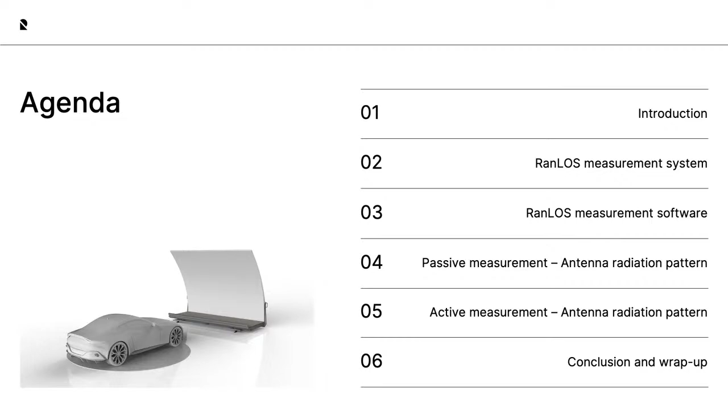Today we're going to present our view on how to do OTA measurement within the automotive industry. So the agenda for today is to give you a short introduction of our company, then we'll go through the measurement system and our software, and then we also have passive and active measurement data as well as videos, and then we have a few minutes for conclusion and wrap up and also for questions.

My name is Louise Rosdahl and I'm the CEO of RanLOS. Today I also have Professor Jan Carlson with me. He has more than 30 years of experience from the EMC and antenna field. He is a member of the International Steering Committee of EMC Europe, and he is also an adjunct professor at Chalmers University of Technology. I also have our sales director, Mr. Lars Granbom. Lars started off at Ericsson many years ago. Then he has been a successful entrepreneur in multiple companies within antenna design and measurements.

Then he applied for multiple patents around the globe, which we now have today in the company. And then the products have been developed during the past years, for instance, in a Swedish government-funded program together with Volvo Cars and some other partners. So that is a little bit about our history, and now I will hand over to Lars, who will present our products more in detail.

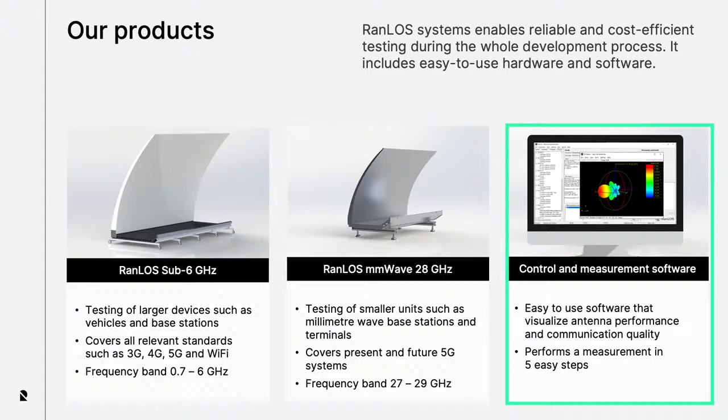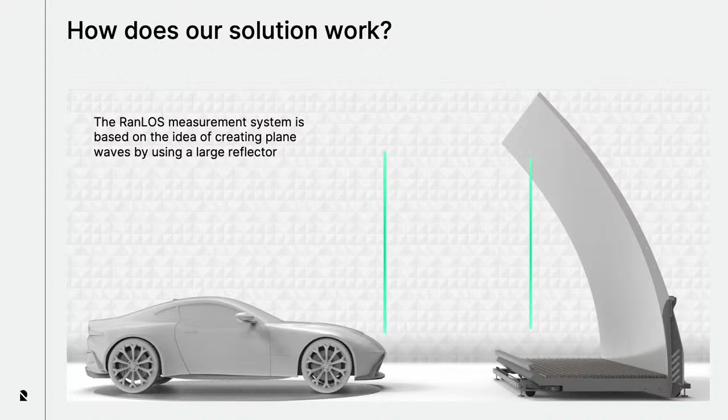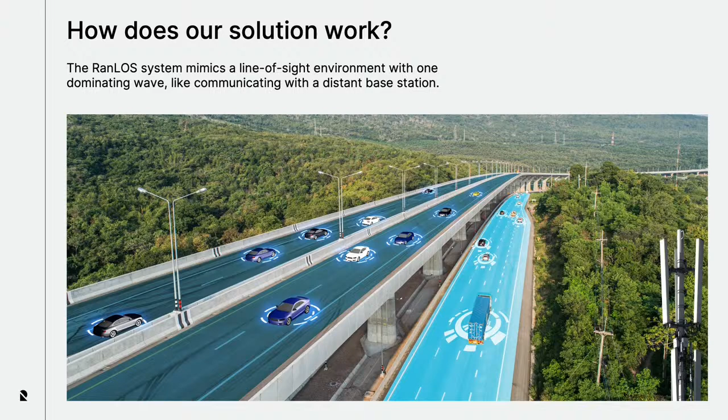This is how it works. A dual polarized linear antenna array is feeding the cylindrical reflector, which is converting the wave to a planar wave, simulating a far field environment for the object that we are testing. Comparing with the real world, the RanLOS system simulates a line of sight environment. Communicating with a distant base station, the dominating wave is arriving at the car in a randomized angle.

If you compare with a mobile phone communicating inside a building, you have a totally different environment that we call a rich isotropic multipath environment. This open environment that we see in the picture is the one that we think is the most used in these kinds of use cases, as we see here.

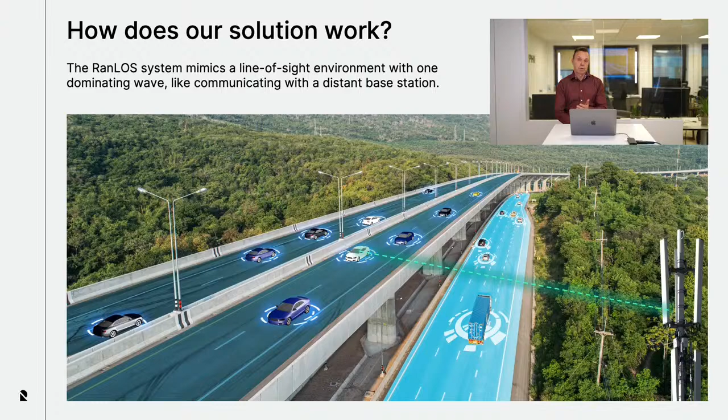The system consists of an antenna array and a cylindrical reflector, as we said before. The antenna arrays are easily changeable. We have today antenna arrays from 700 MHz up to 6 GHz. If we in the future want to have higher frequencies, it's easy to change the antenna array to an array with high frequency antennas.

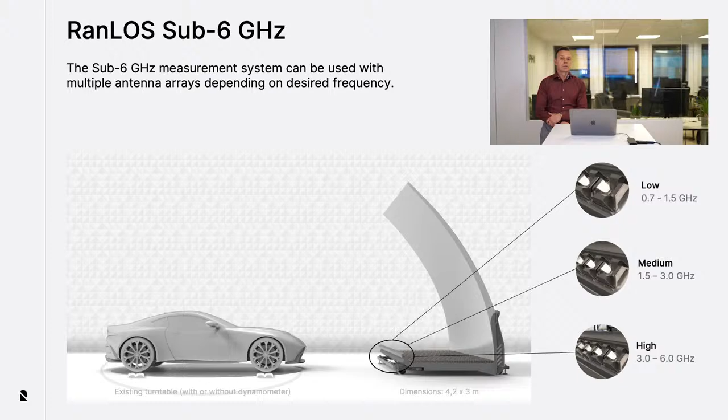The object that you are testing is placed on a turntable, and the turntable can be equipped with or without dynamometers. So this is a simulation of the real-world usage of the car in this case. And with this I hand over to Jan Karlsson.

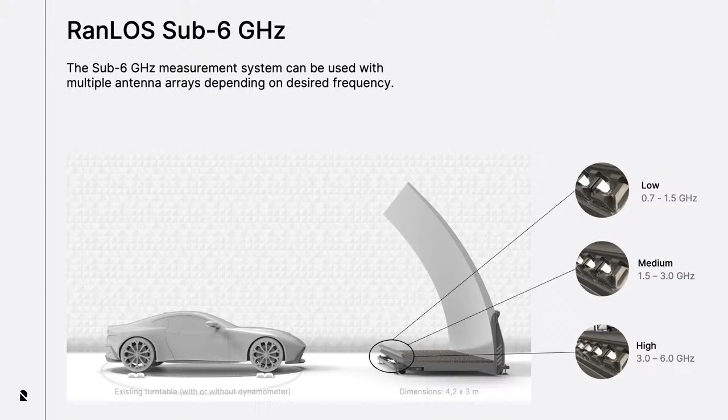So my name is Jan Karlsson and I'm the CTO of RanLOS. And I would like to focus a little bit more on what we actually can use our test system for. So we will start with what we call passive measurements, and that is that we can measure antenna radiation patterns.

So for this measurement, we use a vector network analyzer. One port of the vector network analyzer is connected to our test system, and the other port is connected to an antenna on the equipment under test. And then we have a computer controlling the test instrument, and the computer will also control the turntable in this case.

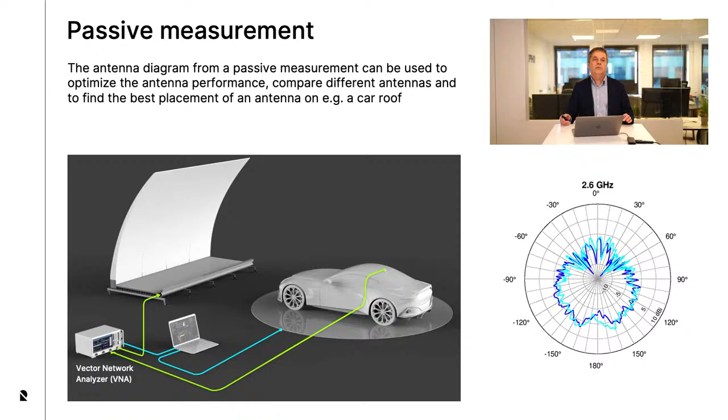So here is shown one comparison that we have done. We have of course done a lot of comparisons, and in the picture to the left you can see the measurement setup with our test system, our sub-6 test equipment, and on the turntable is placed a body of a car. And then we have several antennas on the roof of the car. In this case it was simple monopole antennas.

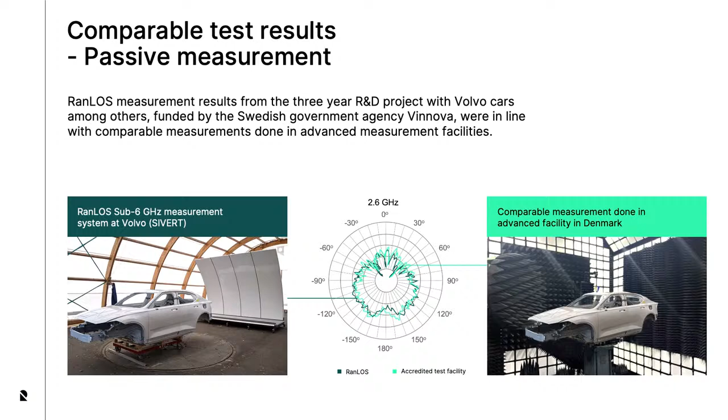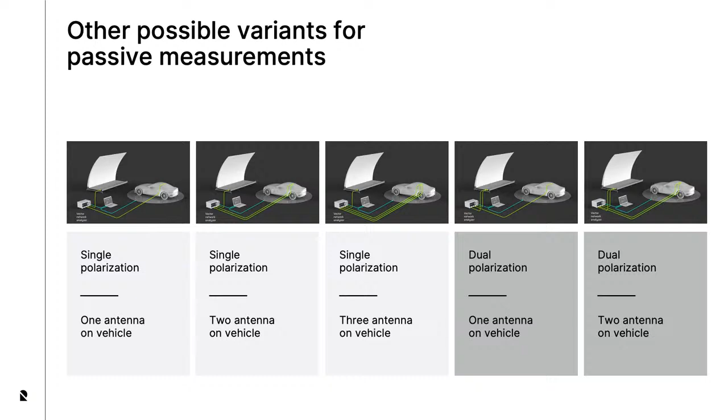And to the right, we have setups for dual polarization. In this case, you connect 2 ports of the vector network analyzer to our test system. And then you can measure the 2 polarizations simultaneously for a single antenna or for 2 antennas on the vehicle. So we have different options here.

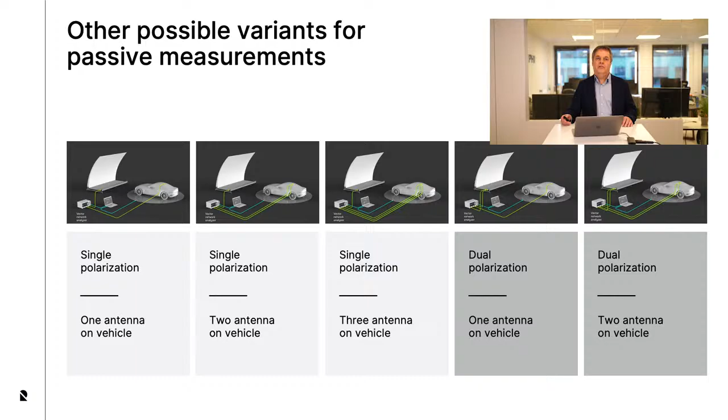So that was the passive measurements, and now I would like to mention a few words about active measurements. By active measurements, we mean that we measure communication performance. That could be block error rate, could be throughput, or other parameters that you're interested in. And this could be 3G, 4G, or even 5G systems. It only depends on what kind of communication test instrument you have.

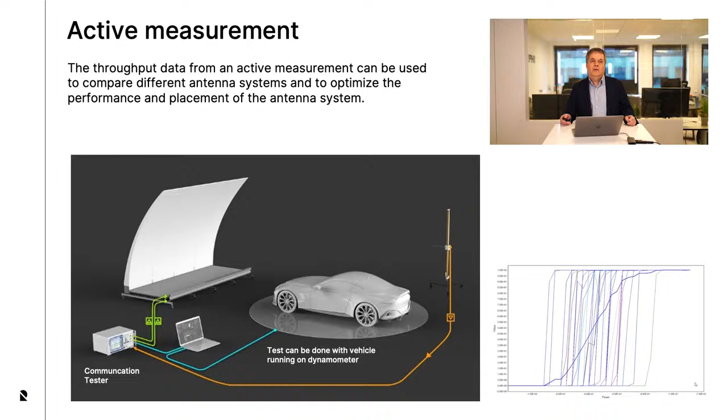So on the y-axis you have the throughput in percentage, 100% at the top and 0 at the bottom. And on the x-axis you have the power level. To the right you have a high power level in the downlink, and then the power decreases towards the left in the figure. So what you can see is that for a high power you have 100% throughput, and then suddenly at some power level the connection is lost. The throughput goes down to 0.

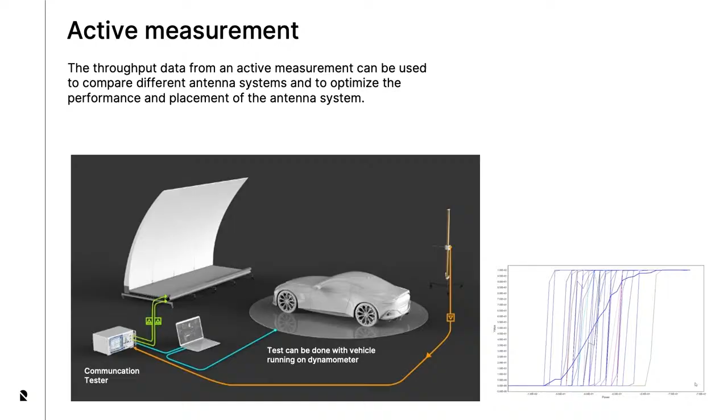In the center figure, you can see actually 4 curves. You have the blue curves representing measurements, and one is solid and one is dotted. And these 2 curves represent different modems on the car. So it's a different antenna system, you can say, on the vehicle. And the turquoise lines represent numerical simulations, and that is quite complicated simulations that we have done in a numerical tool. And that is the picture to the right.

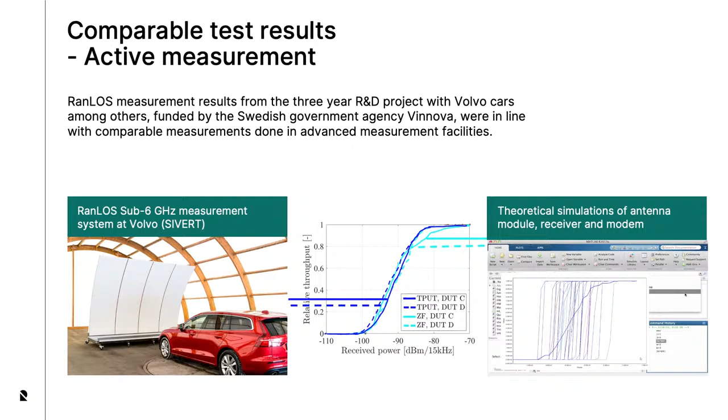But once again, you can also see that the agreement is very good here. So measurements agree with simulations. So we are confident that our equipment works very well for both passive measurements and also for active measurements.

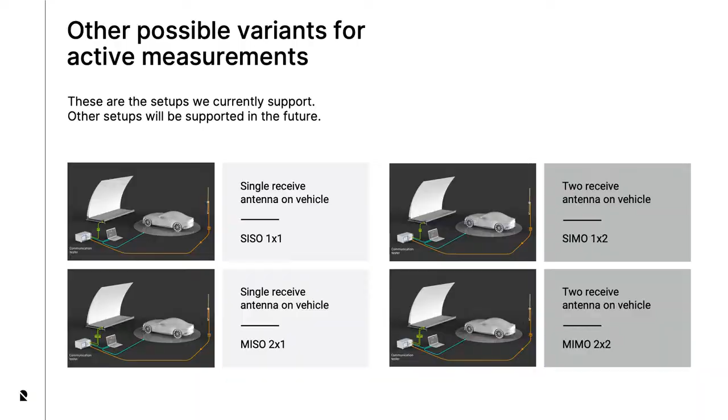Okay, so now you have seen that we can perform two different types of measurements. That is passive measurements for antenna radiation pattern and active for communication quality measurements. And everything is controlled by our software, and the software is easy to use, and you simply follow 5 steps. In the first step, you select the setup, that is, you select from a number of passive or active setups. And in the second step, you select the measurement instrument that you will use. And that could be either a vector network analyzer or a communication tester. In the third step, you select the positioner, and in the case of a vehicle, that is probably a turntable.

In the fourth step, you perform the measurements, and in this step, the software controls the instrument and the positioner and collects the data, which is saved in files. And in the last step, you can analyze the results in many different ways. You can plot the results in different formats.

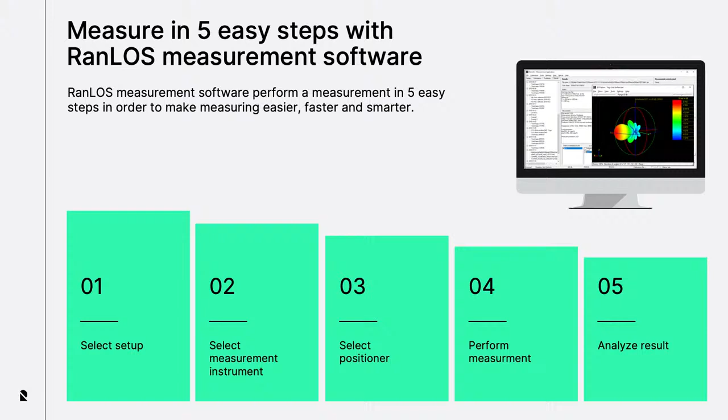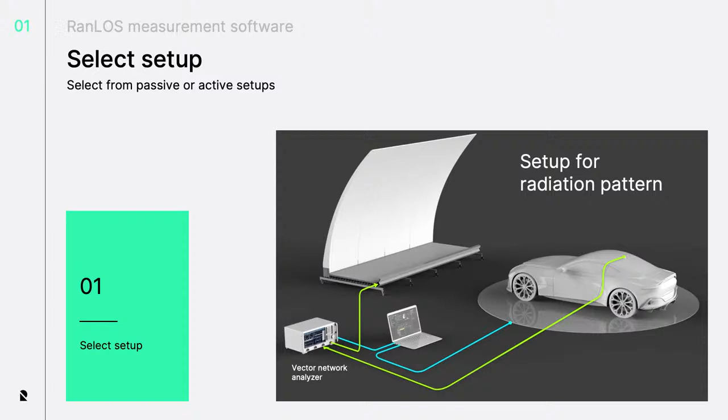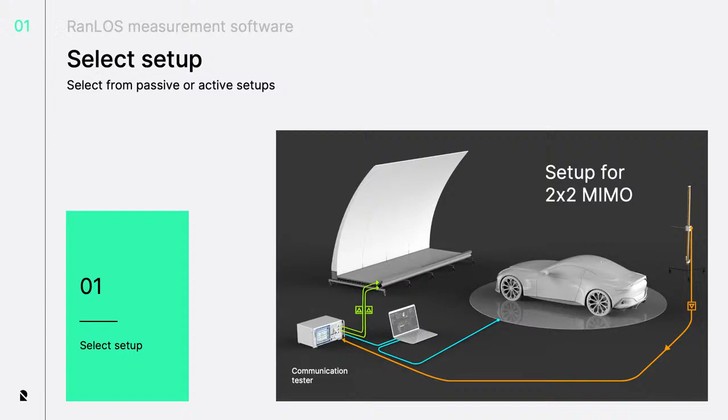So in the first step, you select the setup, and here we have a number of setups predefined in the software for what we call passive measurements, that is for radiation pattern measurements, and we also have different setups for active measurements, for instance, throughput measurements. So we have a number of predefined setups in the software, but you can also easily create your own setup in the software. So that can easily be done.

So that was step 1, and in step 2, you select the instrument that you will use for the measurements. And for passive measurements, you select one of the vector network analyzers that we have implemented. And if you cannot find your vector network analyzer in this list, we can develop a driver for you. So the software is modular, so it can be extended to new instruments.

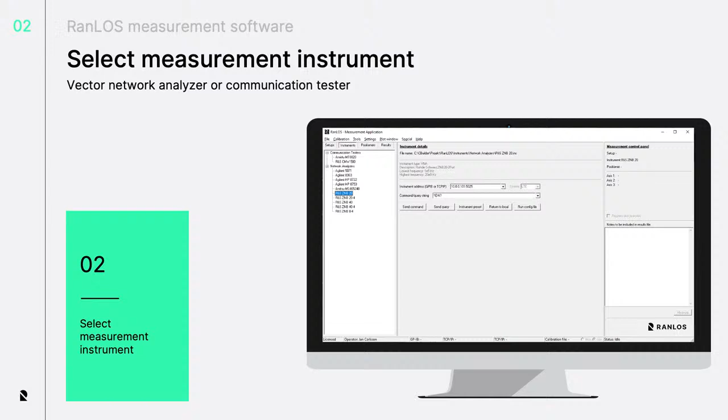You can also select between different types of communication test instruments. And today we support testers from Rohde & Schwarz and also Anritsu. And in the future, we will also support 5G test instruments.

So in the third step, you select your positioner, and perhaps you only have one positioner, and in that case, that might be the turntable in your chamber, for instance, in your EMC chamber. So then you select a driver for that, and if it's not included in the list here, we can develop it for you. And the communication between the software and the turntable can be either a serial communication, it can be GPIB, or it can be TCP. So we have different options here.

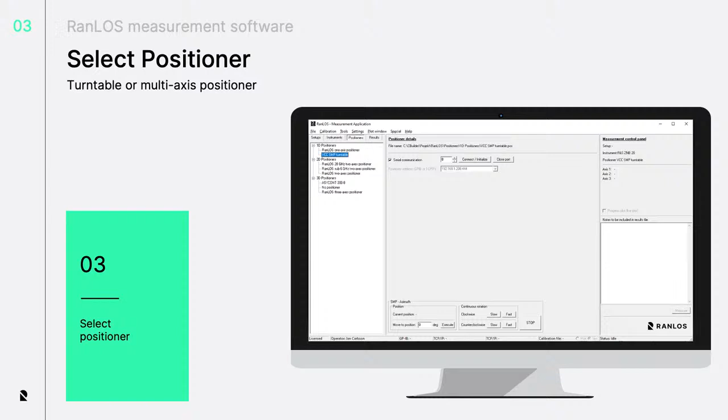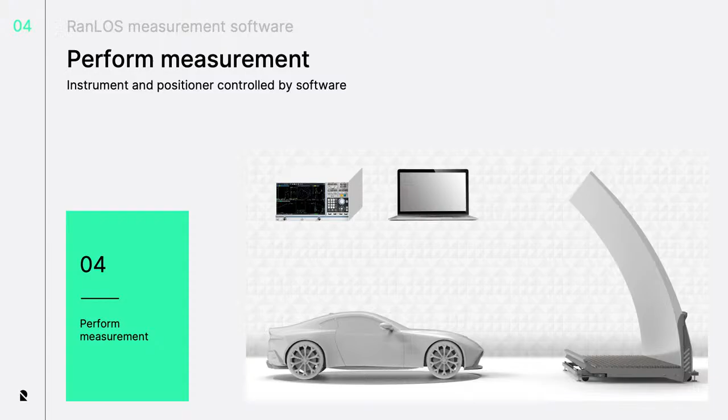So in the fourth step, you just start the measurement, and in this case, the software will control the instrument, and it will also control the turntable. So the vehicle will rotate, and it can rotate either continuously or rotate in steps. And when the measurement is done, the last step is to analyze the results.

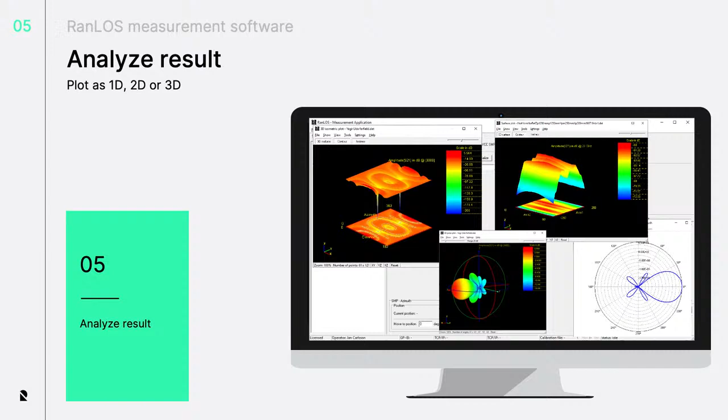And here you can plot the results in many different ways. You can plot it as simple 1D curves, like the polar plots shown in this figure here. Or you can plot it as a full 3D radiation pattern, or also as different kinds of surface plots.

So now we would like to show a video. So this video will show the passive measurement, and that is measuring radiation pattern from a vehicle in this case. So the first step is, of course, to set up the measurement equipment. And here you can see the measurement site at Volvo Cars.

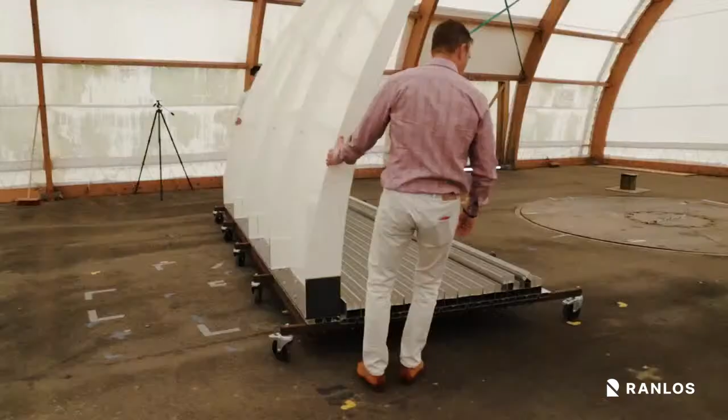And in principle, this is a weather-protected outdoor measurement range. You can also see here that the sub-6 system is placed on wheels, so it's quite easy to position it in front of the turntable at the test site. So if you have an EMC chamber, you can easily roll it out or in the chamber.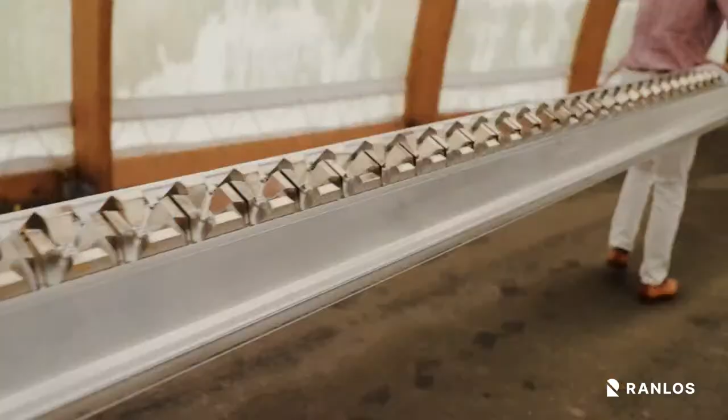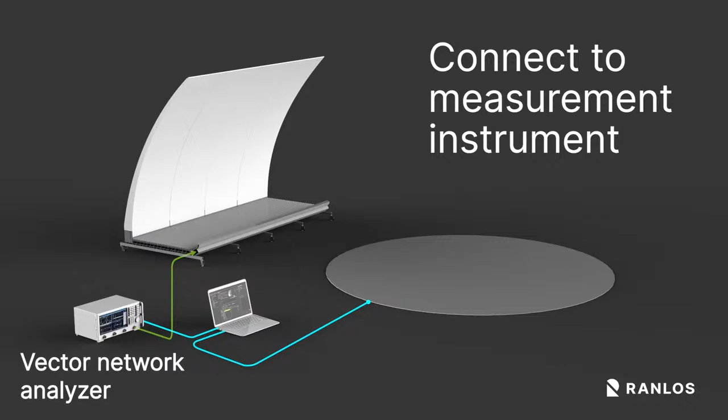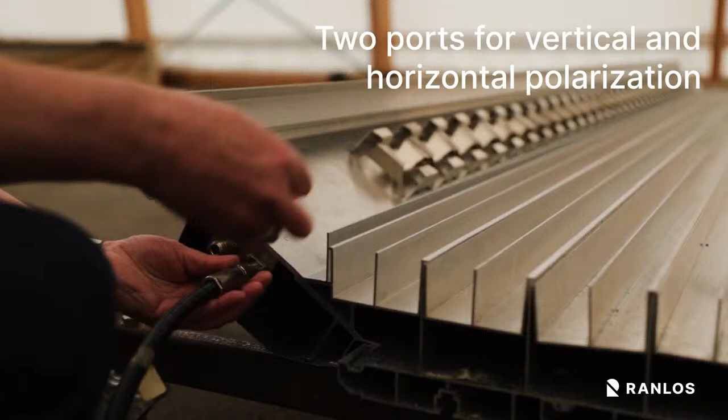The next step is to mount the linear antenna array feed. Here you can see all the antennas, in this case 32 antennas, dual polarized antenna elements. So when everything is set up, you are ready for the calibration. So you connect the vector network analyzer to the RanLOS test system, and in this case we have a 2-port vector network analyzer, so we connect to only one of the ports on the RanLOS system.

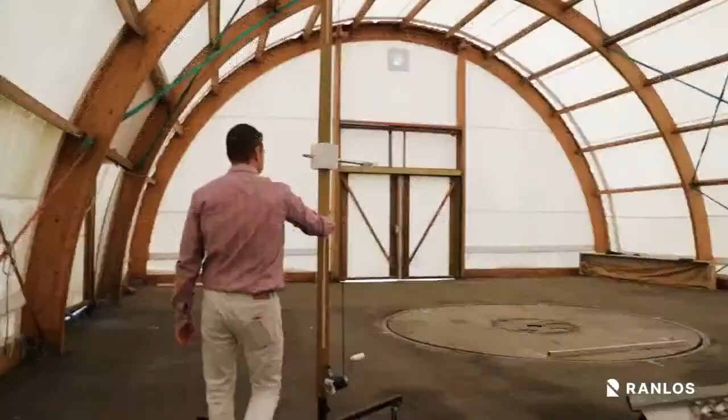In the next step, you measure the height of the antenna that you would like to measure. In this case, we would like to measure an antenna placed on the roof of the car. So we measure the height, and then you take a reference antenna, and that is an antenna with a gain that you know, and we place it on the same height as the antenna you would like to measure. And we place the reference antenna at the center of the turntable. And in this case you can see that it's a biconical dipole antenna.

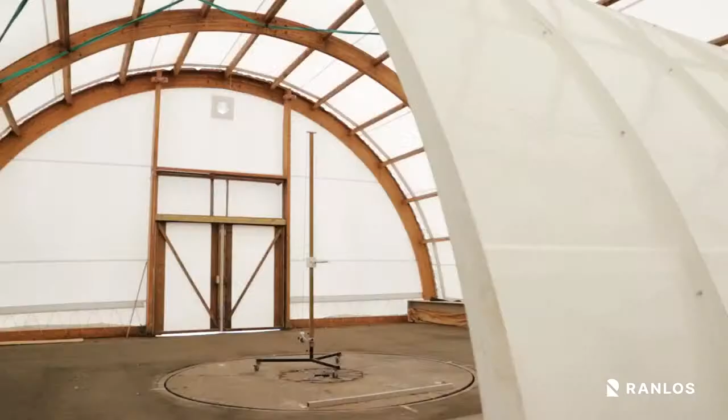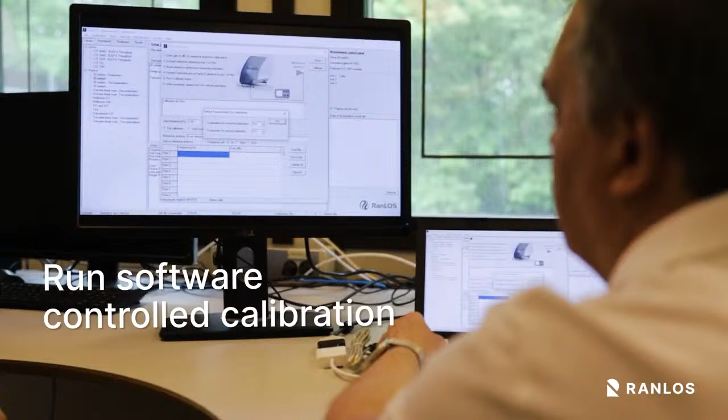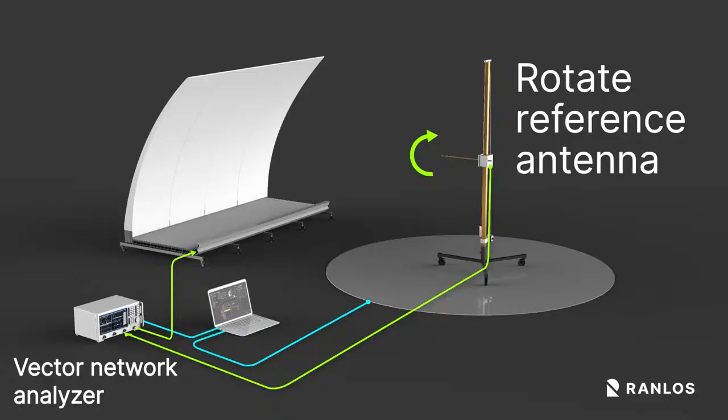So now everything is connected and you are ready for calibration, which you will simply do by using a special procedure in the software. So the software will control the calibration. So first you calibrate for one polarization, and then you rotate the antenna 90 degrees to calibrate the other polarization. And since we only have a 2-port vector network analyzer, we need to reconnect the cable.

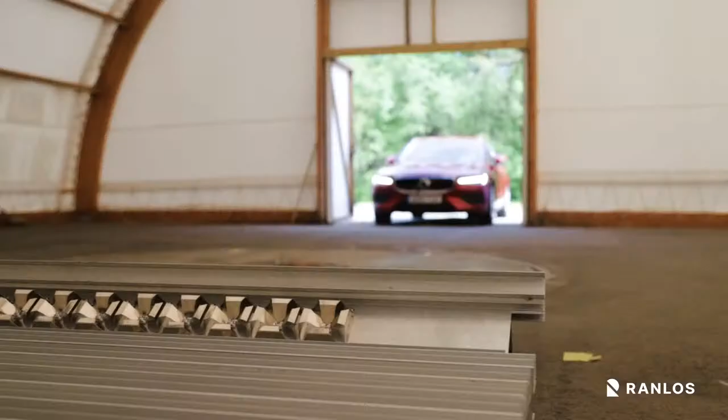Now it's time to perform the actual measurement, and in the first step you position the vehicle under test. So you position it on the turntable, and then you should connect the antenna, and here you can see the coaxial cable coming up from a rotary joint in the center of the turntable. So you connect the vector network analyzer to the antenna in the vehicle.

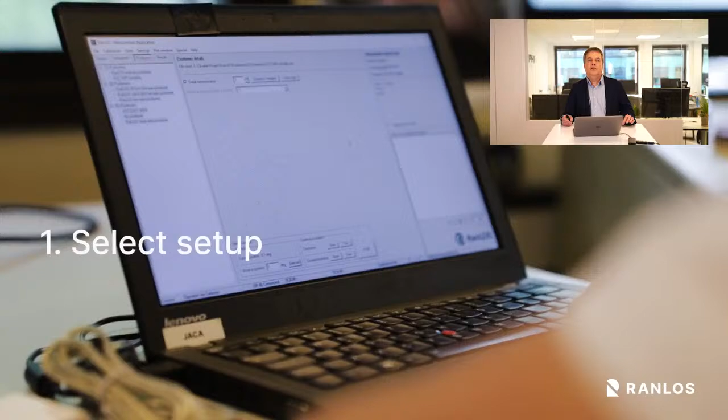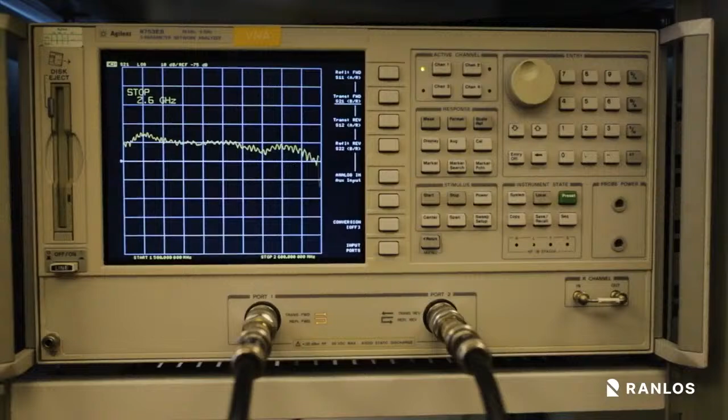So now everything is set up for the measurement. So you select the setup, you select the instrument, select the turntable, and then you simply press run in the software, and the measurement starts. And as you can see, the vehicle is rotating on the turntable, and it could be a continuous rotation, or it can be rotated in steps. And here is the vector network analyzer taking the frequency sweeps.

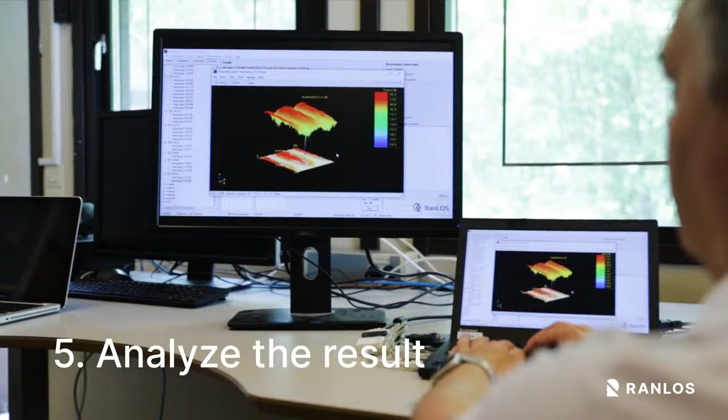And when everything is done, you can analyze the results. Here is shown a surface plot where you have frequency on one axis and the angle on the other axis. So it's very easy and fast to do a measurement.

So now we would like to show another video, and in this case it's a video on how to perform active measurements. So the first steps are the same as for passive measurements. So you do a calibration and so on. And then you position the vehicle under test on the turntable, and in this case you do not need to connect any cables to the vehicle. The vehicle will communicate with our test system.

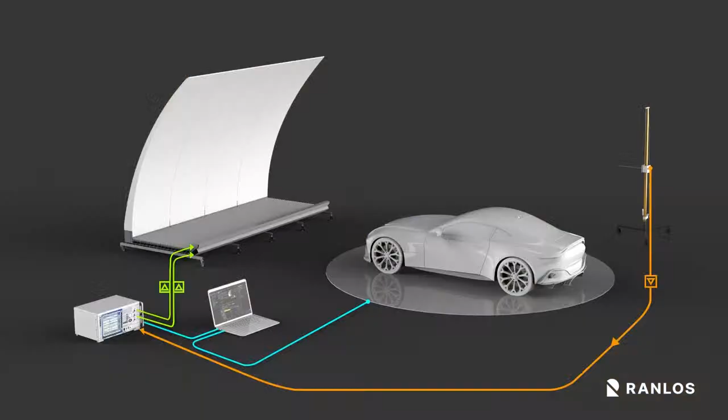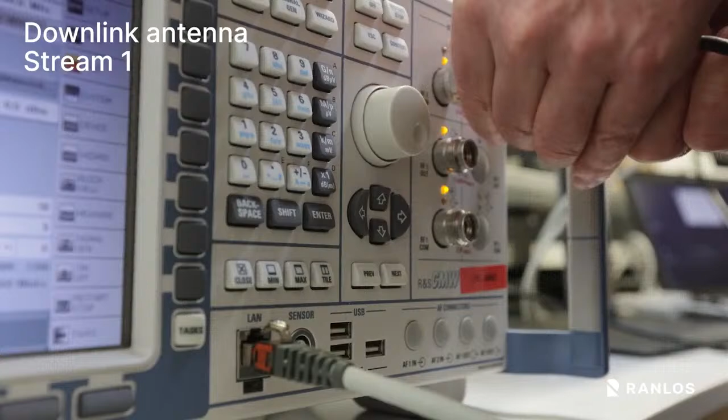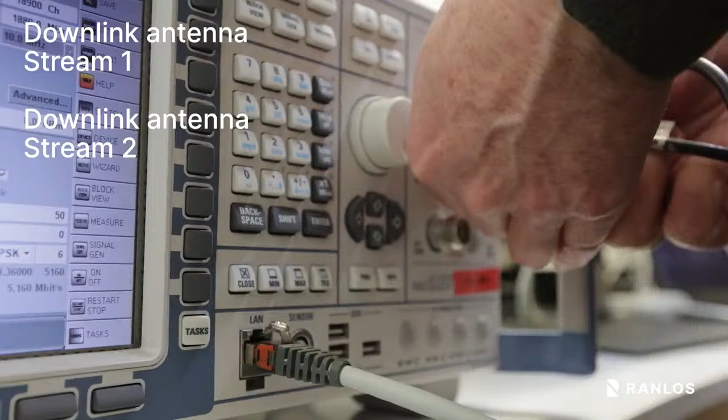And this is the setup that we showed before. This is the setup for 2x2 MIMO. So we connect the different antennas to the communication tester. First we connect the downlink antenna for stream 1 to one of the ports. Then the downlink antenna for stream 2. These are the two cables going to the RanLOS test equipment, and then we have the uplink antenna.

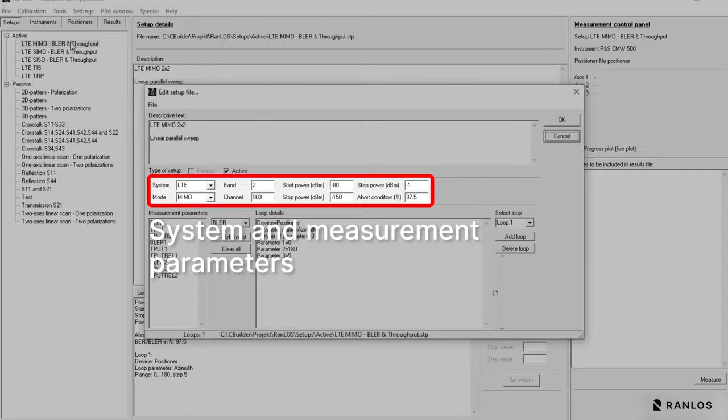And then you select the measurement setup, in this case a MIMO 2x2 setup, and here you can set different parameters such as which system you would like to measure, in this case LTE, which parameters to measure, and also how the turntable should be rotated.

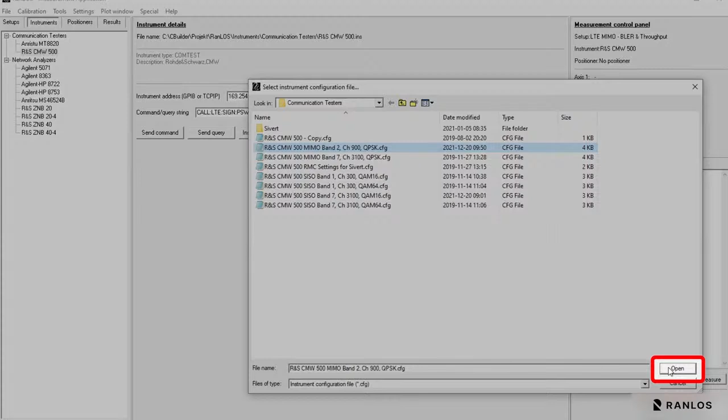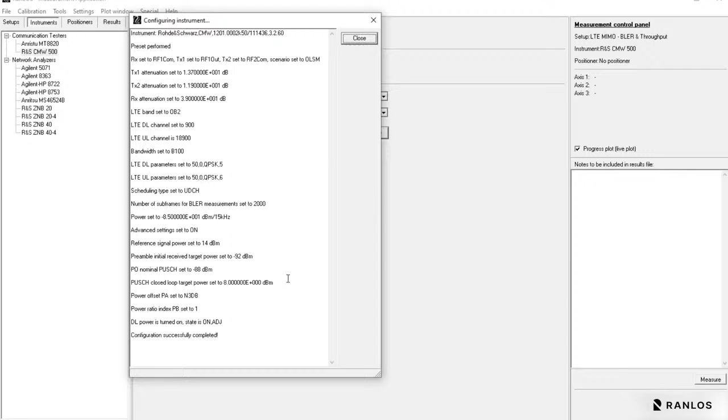And in this step we select an instrument configuration file. That is a file that will perform a lot of different settings on the instrument. So here you can see the different settings, and you can also see that the configuration was successfully completed. So now you are ready for the measurements.

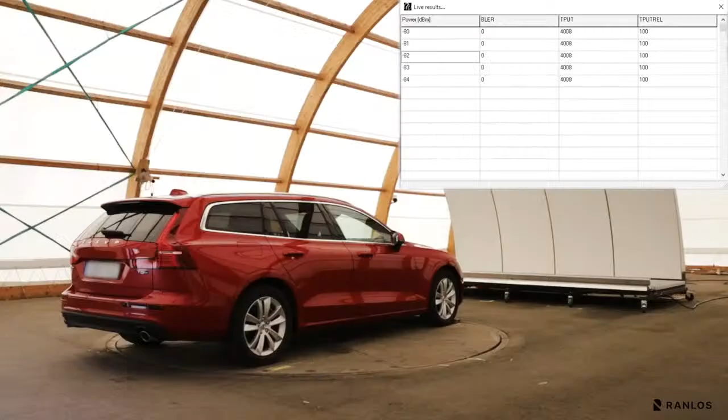So you simply press start in the software, and here you can see a table. In the leftmost column you have the power, so you start at a high power and then the power is decreased until you lose the connection.

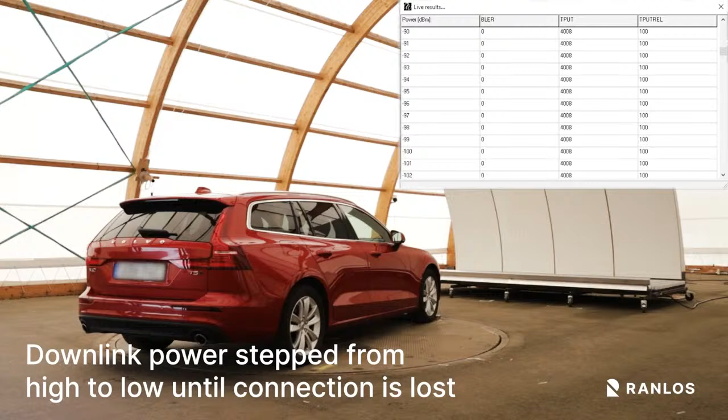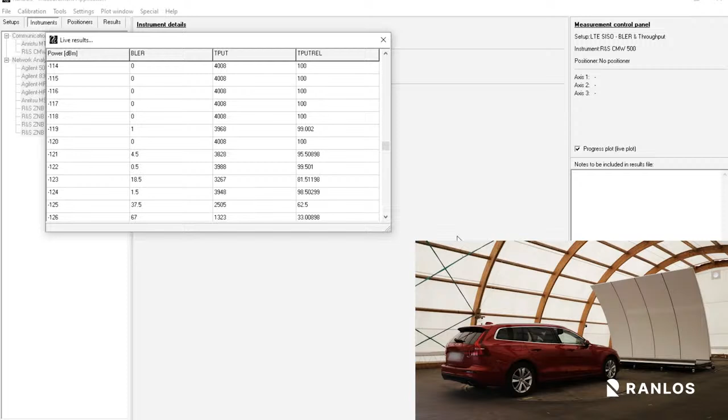And then you can see that the vehicle is rotated in steps. So here you can select, of course, the size of the step. I think in this case we used a 5-degree step, but you can use whatever you like, of course. So here you can see that the relative throughput goes down to 0, and now the measurement is completed. And now you are ready to plot the result.

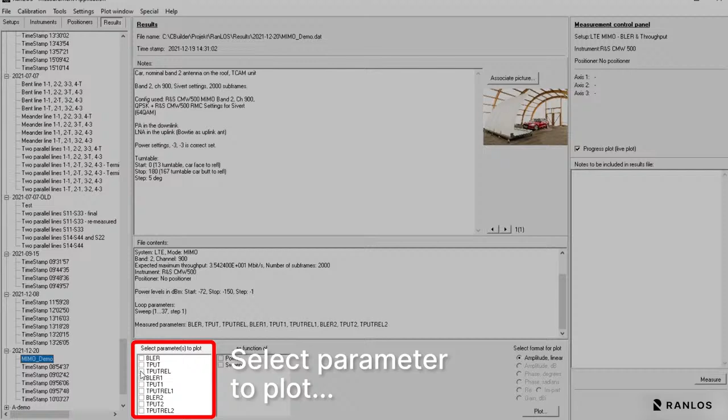So you select the result file in the left part of the software, and then you select which parameter you would like to plot. And in this case I select the relative throughput as a function of power level, and then you select one of the different rotation angles.

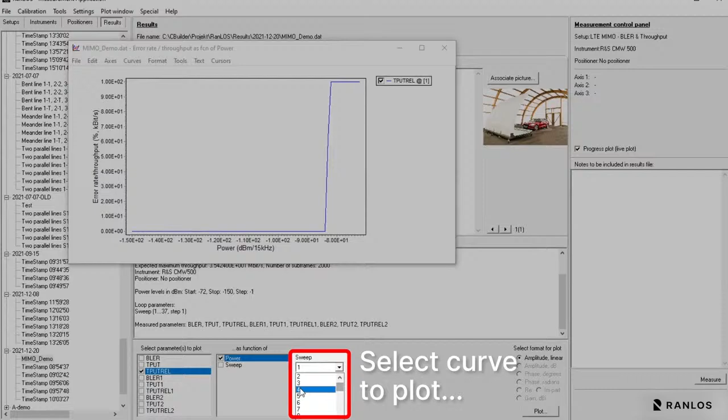So here you can see the relative throughput for one angle, and then you can select some other angle and add it to the same plot. So now we have two different throughput curves for different rotation angles.

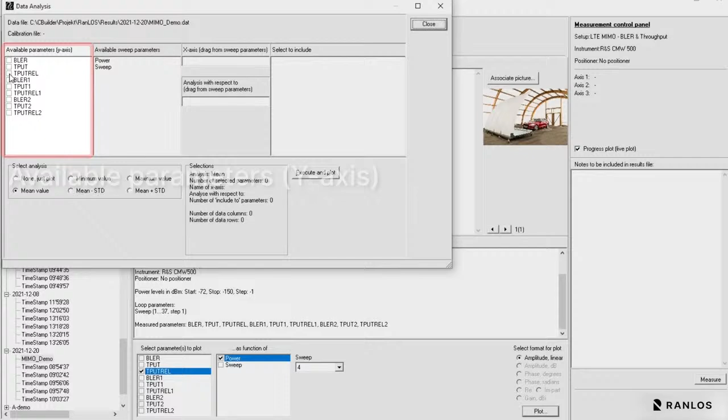You can also go to a data analysis possibility in the software, and here you can once again select what you would like to plot, the relative throughput in this case, and I would like to plot it as a function of power. So I would like to have power on the x-axis, and then I can also select which curves I would like to plot, and you can see that we have 37 different curves in this case.

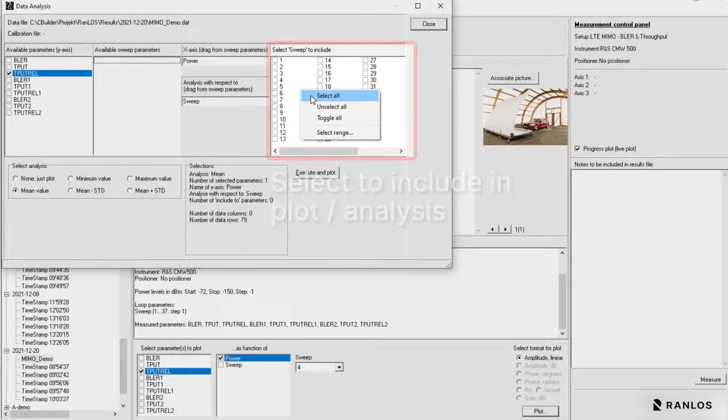So I would like to plot them all, and here you can select different analyses, but to start with I just plot all curves, and that we can do by a simple click on a button. Here you can now see 37 curves for the different rotation angles of the vehicle, and you can see that they vary, of course, depending on the rotation angle of the vehicle.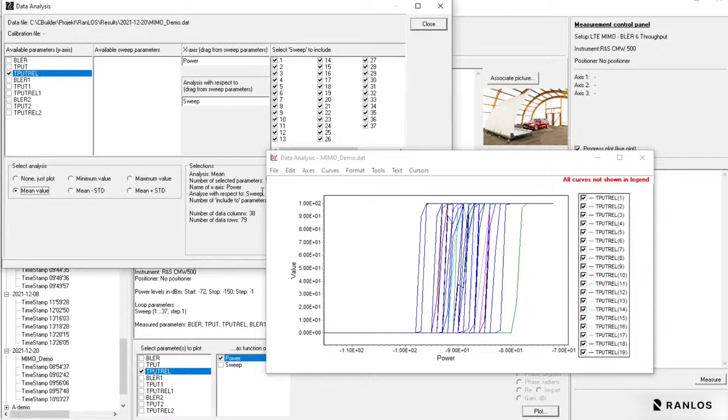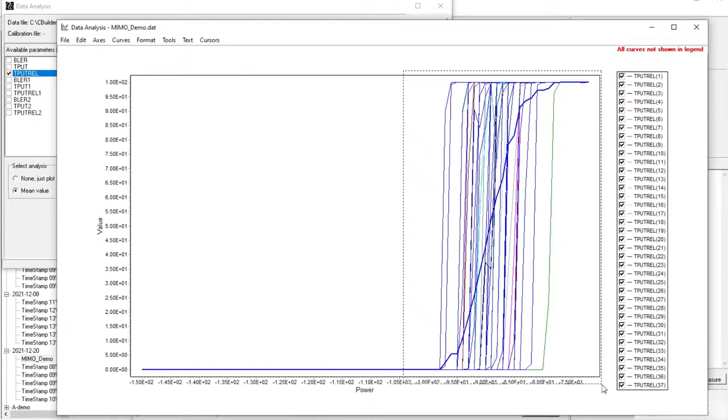And this is just one example to show that we can do some analysis, and you see the thick curve here is the mean value of all curves. And you can also do other types of analysis here, standard deviation and so on. So that's the active measurements.

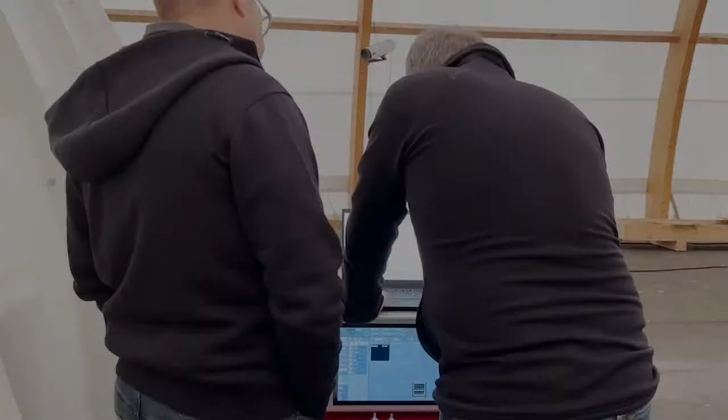So now I would like to hand over to Louise again. Thank you so much, Jan, for guiding us through the videos.

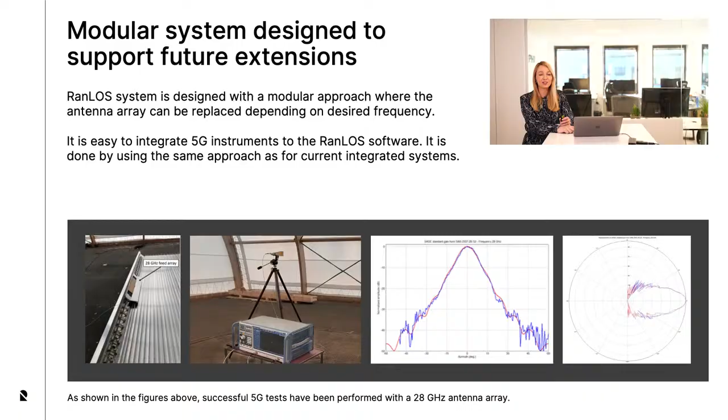So in summary, the test system that we have is accurate. It doesn't require an advanced test chamber. It's accessible. It can be used on an everyday basis. It's easy to use for test engineers, and you don't have to have a specialist education. The software is 5 simple steps, for instance. So what we would like to offer is the possibility to test earlier, test more frequently, and as often as needed, to enable testing during the whole development process.